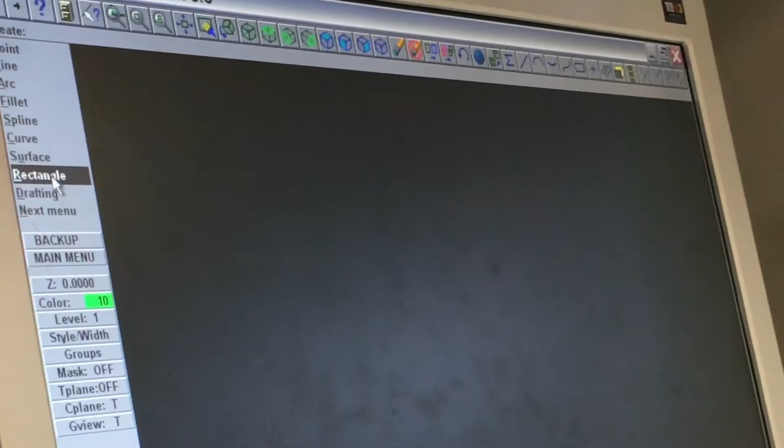Recording. Okay, we're going to start drawing by creating a rectangle. We can create the rectangle from the main menu, 1 point, select the bottom square here, and the width is 8.5 and the height is 5.

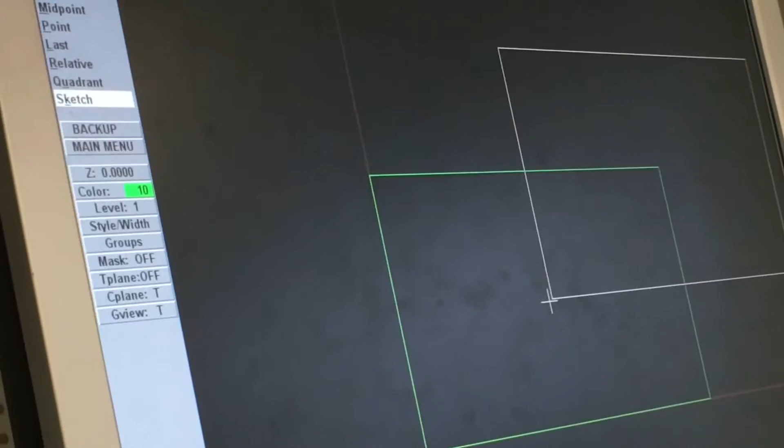Hit F9 on your keyboard to show the axes and the origin. We're going to snap to the origin, place by clicking the mouse. Alt F1 to resize your screen, Alt F2 to zoom out 20%.

Next, we're going to create some lines, horizontal and vertical, crossing inside the square. So we'll say create line, endpoints, midpoint, from one side to the other side, from the top to the bottom.

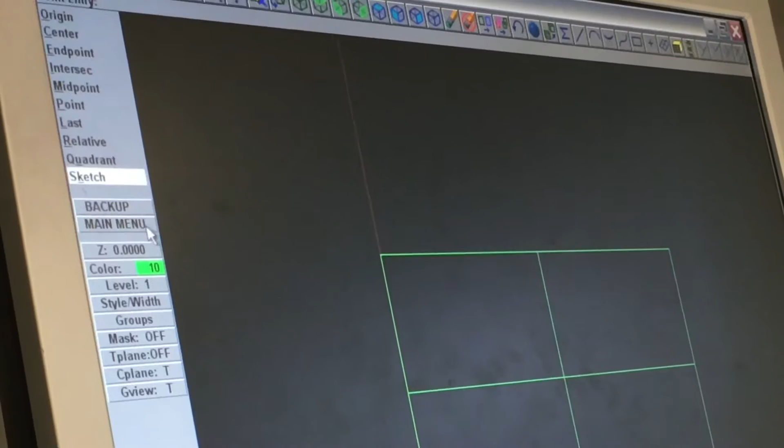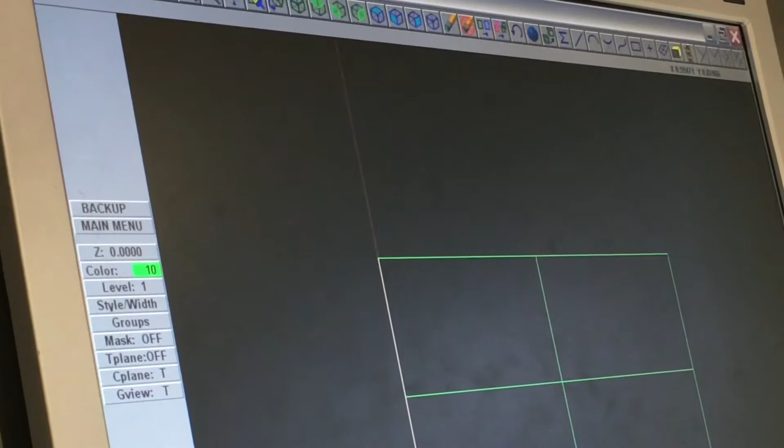From the main menu next, we're going to offset the left vertical line 2.25 inches. So we'll say Xform, offset, copy, 2.25. Click on the line we want to offset, move your mouse to the right and click in the direction of the offset.

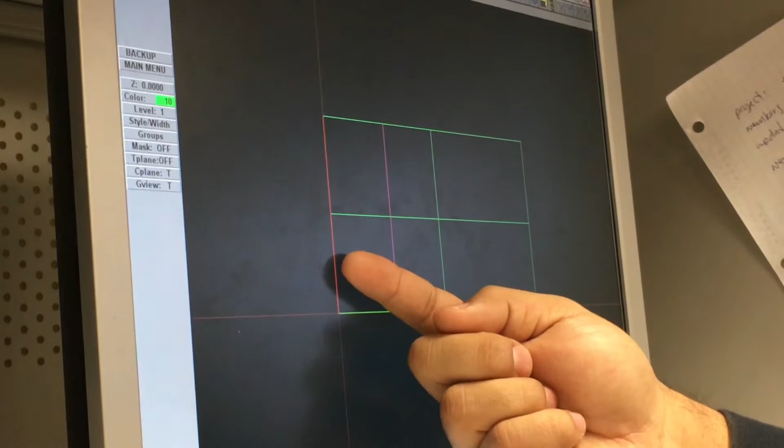Next we're going to create a polar line. Create line, polar, endpoint. From the endpoint of this purple line towards the bottom, we want 180 degrees minus 30, because we want a 30-degree angle here, and drawing a line in this direction is 180 degrees, so we just want to go up 30. The line is 2 inches long.

We're going to go ahead and trim this. Modify, trim 1, trim here, trim here, trim here. So we click what we want, then click where we want it to stop, at the intersection of this line. Next we're going to create 2 small squares.

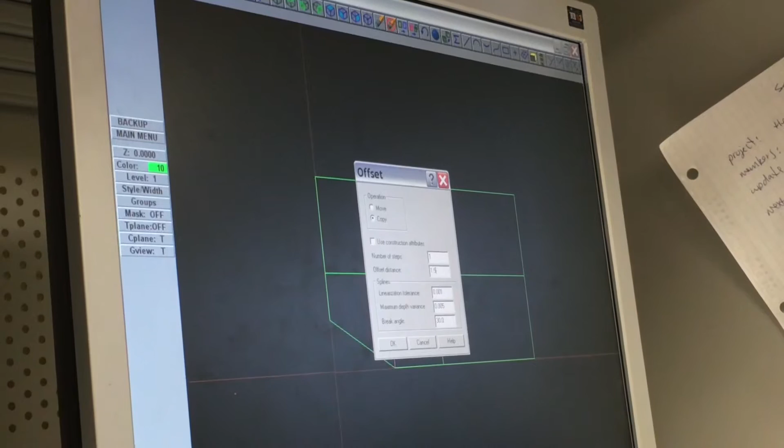Xform, offset. We're going to offset the cross 1.5 inches, in this direction, this direction, this direction, and this direction.

Modify, trim 2. 1, 2, 3, 4, 5, 6, 7, 8. Delete the construction line that we used to create the polar line.

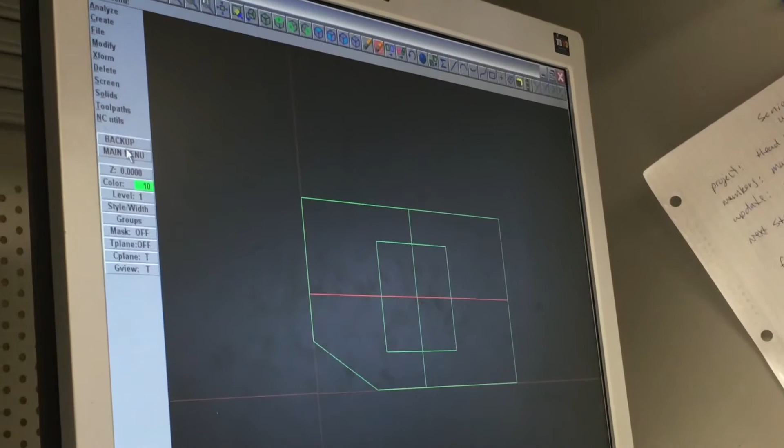We're almost done. Now all we have to do is say Xform, offset, 1 inch distance, and we'll go from here to here.

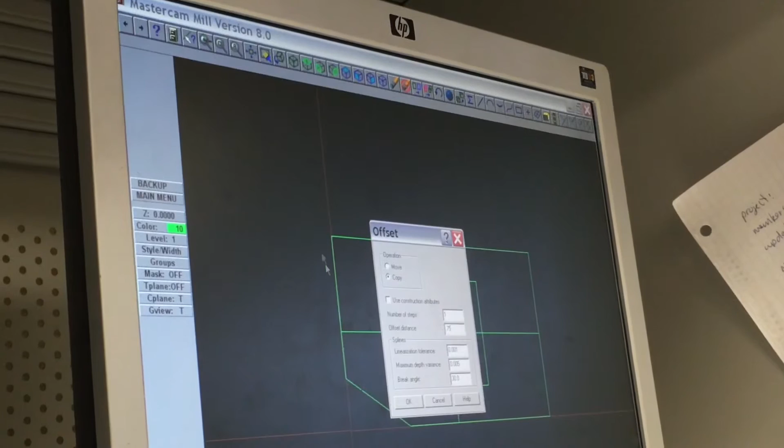Next step, we're going to offset this vertical line to the left 3/4 of an inch, 0.75 distance. Then we're going to offset this horizontal line that's glowing white down 1 inch, so I changed the distance to 1.

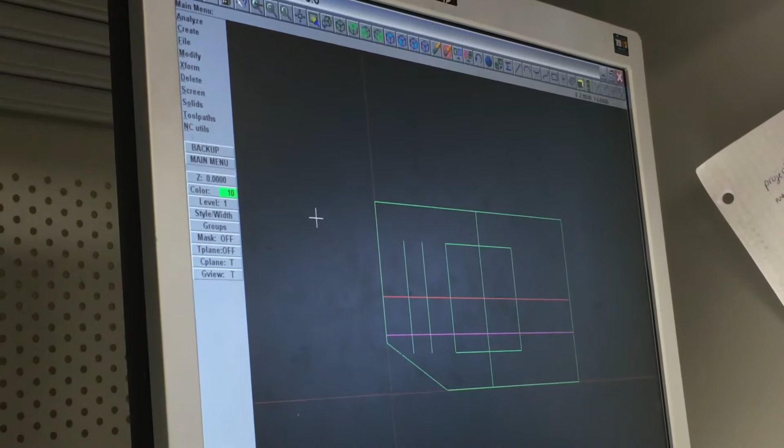Now we have all the information we need to finish the drawing. So let's go ahead and clean up our construction lines. Modify, trim 2. Click, click. Click, click.

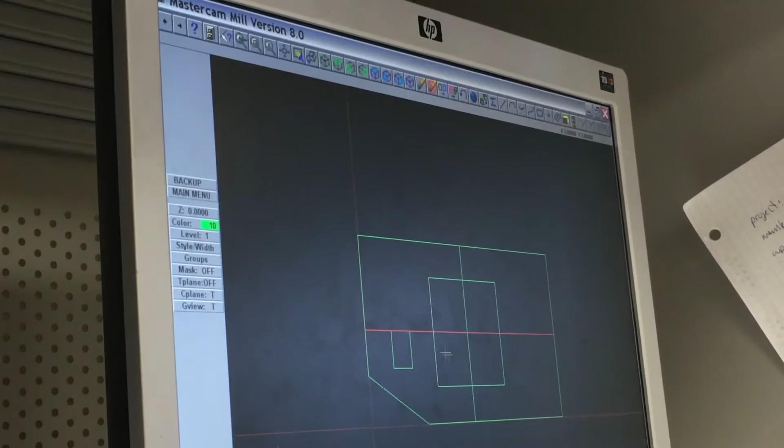Back up, trim 1. Click, click. Click, click. This should be pretty much everything we need to finish the drawing based on the lines of symmetry we have. The cross represents our lines of symmetry.

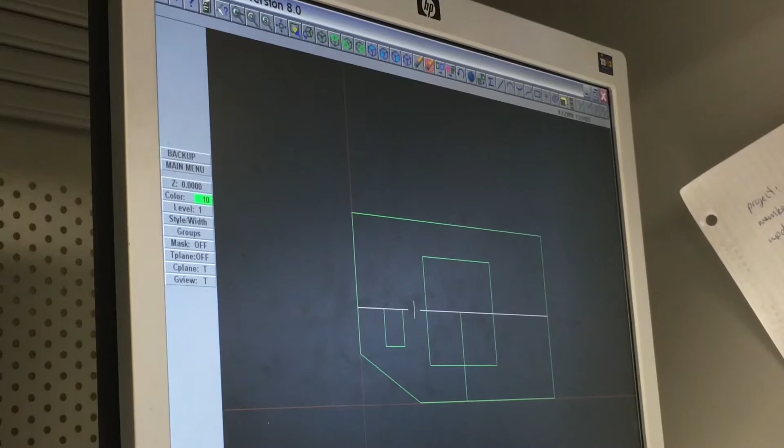So now I'm going to get rid of everything else that's not this bottom left corner of the drawing. Modify, trim, 1 entity. Trim, stop. Trim, stop, repeated several times. These are your extra lines now outside, so we're going to jump into the delete menu.

Delete, 1, 2, 3, 4. Now we're at the last 2 steps. From the main menu...

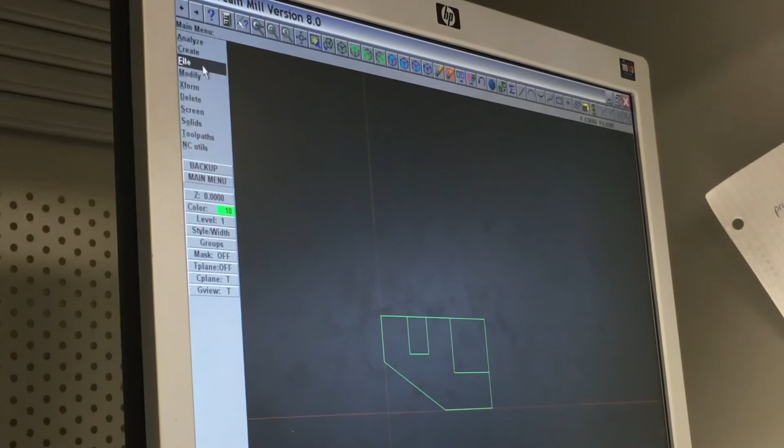Xform, mirror, all entities, done, on a line. The line we're choosing is this line, the vertical line to the right. We're going to copy. Okay.

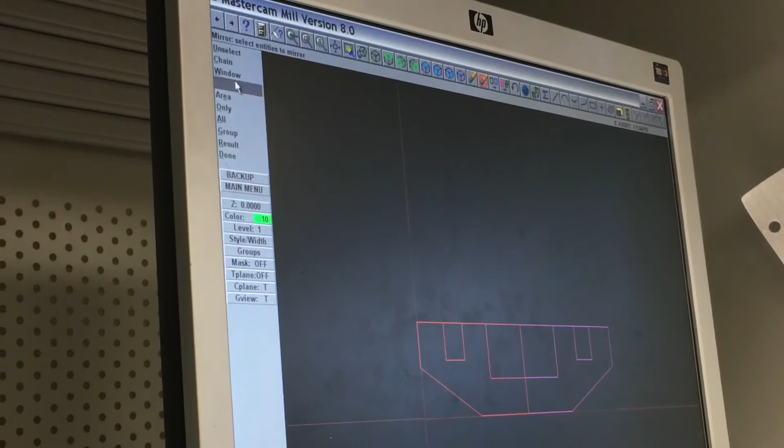Now we want all of this to be copied up. So we're going to say all entities again, done, line, and now we have the whole drawing.

The last step is we're going to delete the construction lines. Delete, delete, delete, delete, delete, delete, delete, delete. There are 2 lines in every one of those positions. You can clear colors, and this is the drawing.